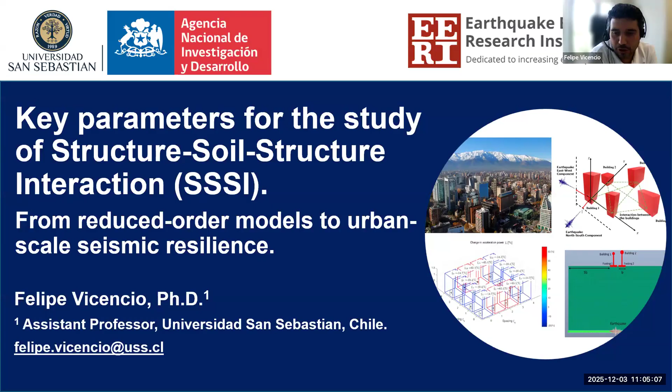So today I will talk about the key parameters for the study of structure-soil-structure interaction. Basically, the work I will show you here is based on reduced order models, which were calibrated in different ways, like finite element simulations and experimental campaigns. Also, I will present some results from the Fondecyt projects that we are working on here in the university. The main goal of this talk is to better understand when neighboring buildings significantly change each other's seismic demands, and how we can capture this in practical analysis.

So this is the outline of the talk. I will start first with a brief introduction of soil-structure interaction. Then I will go deep into structure-soil-structure interaction. Basically, it's a little different because here we start to consider multiple buildings and also some broader concept of site-city effects.

After that, I will describe the low fidelity nonlinear models we use here, how they are built, what assumptions we make, and which parameters are important. Then the key findings from the projects, and finally, I will discuss with you the future work and urban scale resilience, including where I think this line of research is going.

Let me start with soil-structure interaction. Basically, soil-structure interaction is the change in the dynamic response of a structure caused by its interaction with the supporting soil and the foundation system. In every case we have this kind of phenomenon, but for some cases this is not important.

For example, for stiff or rock sites, these effects are often small, and some codes allow ignoring them. But here we are focused on cases where soil-structure interaction is important, for example for soft and intermediate soils.

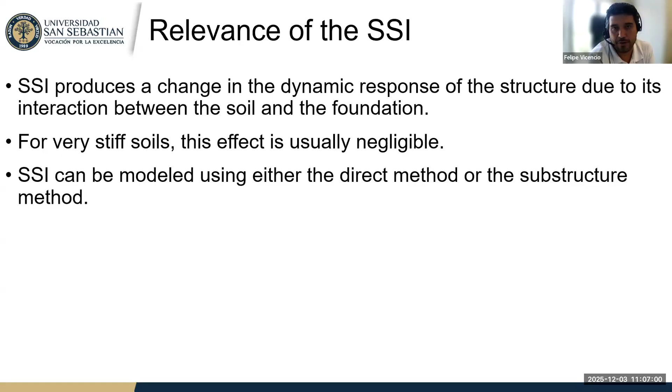Also, SSIs can be modeled using different methods, as we will discuss later. The importance of SSIs depends on three things: the stiffness and mass of the structure, the stiffness of the soils, and the damping characteristics of both the soil and the buildings.

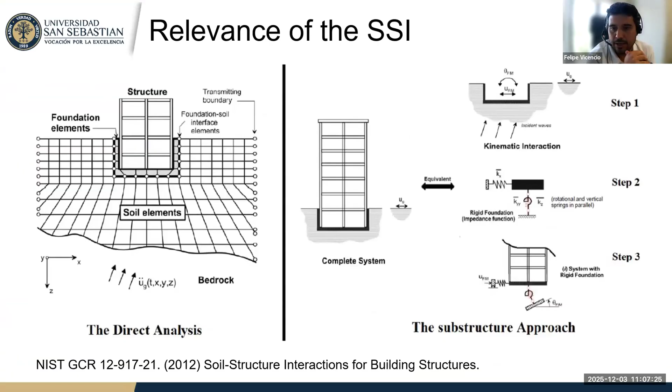This figure is from the NIST report that I recommended, where they explain very well which buildings are important to consider for soil-structure interaction, and also explain the different methods. For example, on the left you have the direct analysis, where the soil and the structure are modeled all together in one large numerical model. We also have the substructure method, which is divided into different steps, where you can consider the kinematic interaction and the inertial effects.

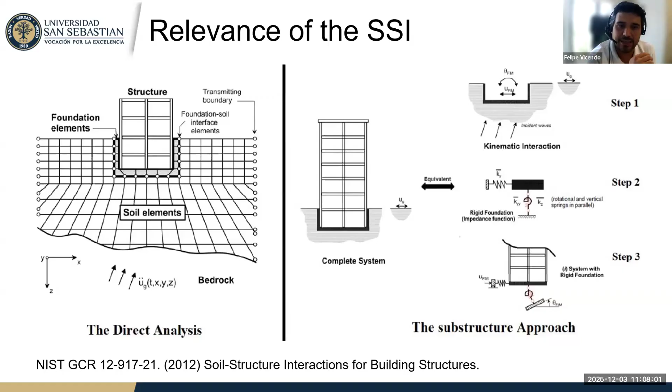Here we are more interested in the relevance of structure-soil-structure interaction. Why is that? In modern cities, buildings are not isolated. Urbanization and current lifestyles have moved population into dense urban centers where structures are separated by just a few meters in some cases and sit on the same soil deposit.

Here we can see a great example: this is Santiago de Chile. We have a large density of buildings built very close to each other. During an earthquake, the deformation of the shared soil layer couples the response of neighboring foundations. This is what we call structure-soil-structure interaction, or SSSI.

SSSI can lead to an amplification or reduction of seismic demand. If we extrapolate a pair of buildings to an entire city, we get the idea of site-city interaction. So when we consider the whole city or a very large neighborhood, we are considering the site-city interaction.

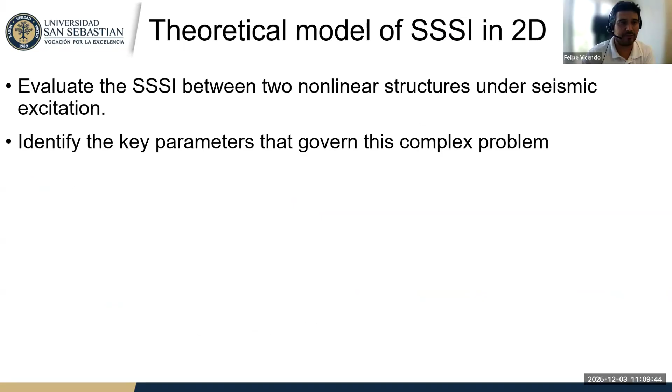So why is this important? The first thing we need to consider is the numerical model, the theoretical numerical model. In this case, we evaluate the SSSI between two nonlinear structures under seismic excitation. Identifying the key parameters that govern this complex problem is very important for us.

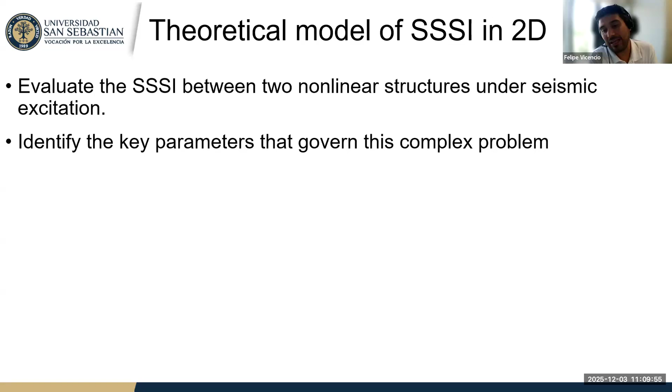To answer this question about the key parameters, we can use a low fidelity nonlinear model like I show you here. For more details, you can see the paper 'Seismic Structure-Soil-Structure Interaction between Inelastic Structures,' where I show all the details and formulation. So now we have just two buildings interacting with each other through the soil.

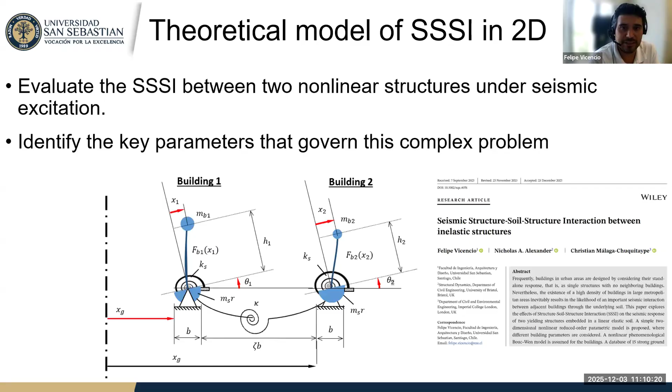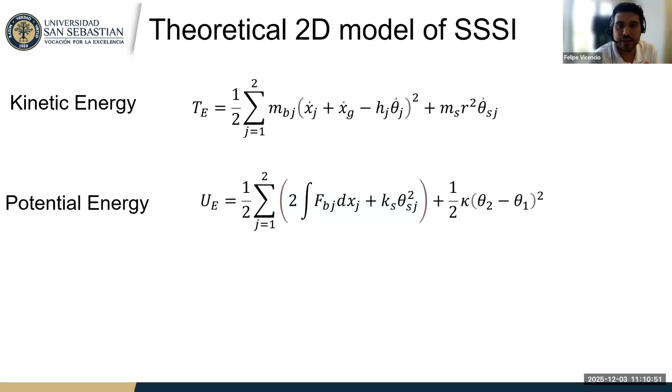The model is formulated in terms of kinetic and potential energy. The kinetic energy includes the translation of the buildings and the rotation of the foundation. In the case of the potential energy, we consider the nonlinear behavior of the buildings, we can also consider the nonlinear behavior of the soils, and also the parameters that include the interaction between these two buildings.

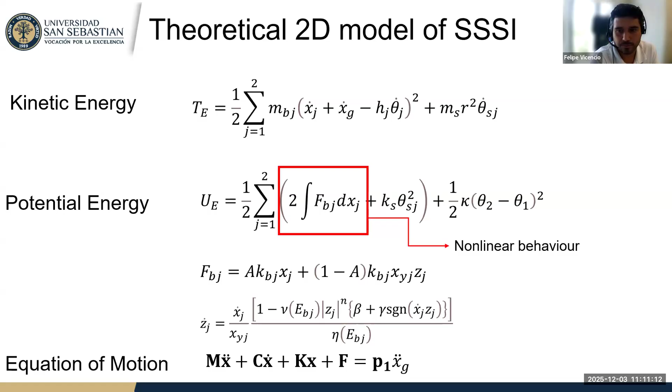To model the nonlinear behavior in this particular case, we use the Bouc-Wen model, so at the end we can write the equation of motion for the whole system. The thing is, the stiffness between the buildings is not arbitrary—it's derived from simplified analysis expressions and then calibrated against more detailed models.

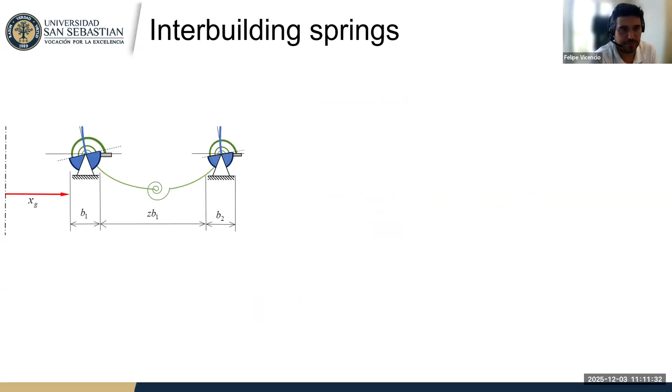This includes finite elements and experimental data from the literature. Here I show you one of the calibrations using theoretical and numerical analysis. Our aim is to try to estimate this kappa parameter, and then we can rewrite the equation of motion.

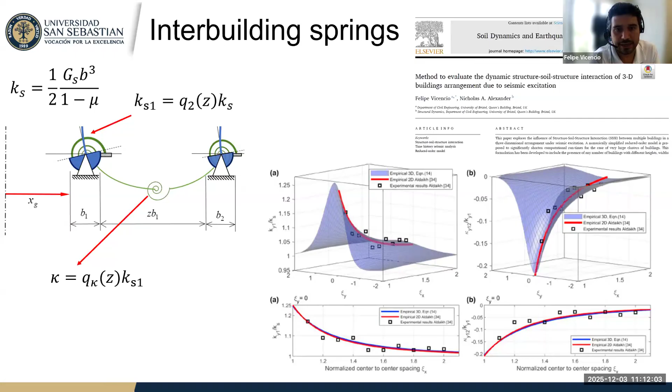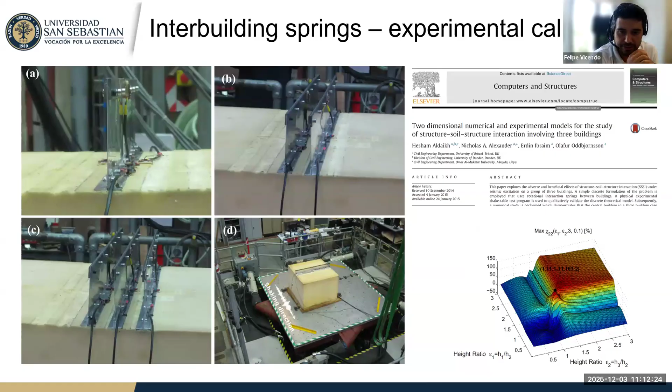For more details, you can also see this paper that we wrote with Nick Alexander from Bristol. We also have to calibrate this interactional spring and these interbuilding springs using some experimental campaigns. In this case, I show you one particular campaign considering 1, 2, and 3 buildings, but you can also have a more complicated configuration with different heights, different inter-building spacing, and different numbers of buildings.

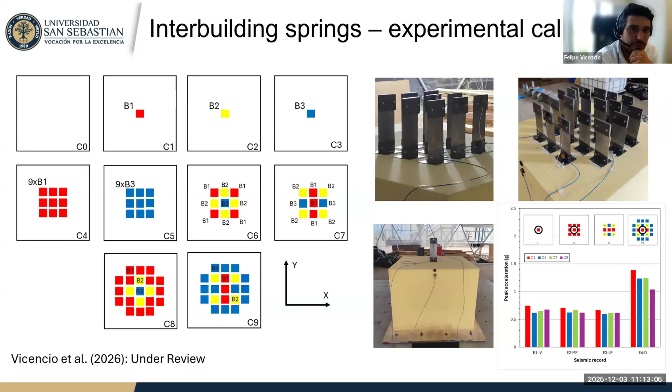This is a paper I'm working on right now that is under review, where we calibrate these interbuilding springs and compare the seismic response for 1, 9, and 19 buildings. This is basically our experimental campaign using the shaking table from the Universidad de Santiago. We also have to calibrate and compare the response using high-order finite element methods.

We can also show you some work we are doing here for asymmetrical buildings, isolated buildings, and different kinds of buildings, because basically you can rewrite and recalibrate this kind of configuration depending on the structural typology and the soil properties.

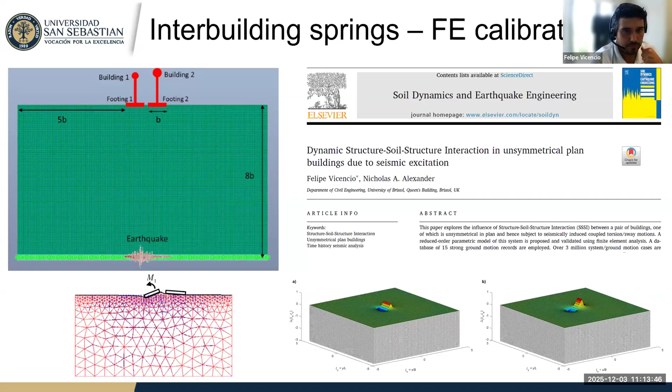Here are some simulations using high-order finite element methods, considering CLT buildings, basically cross-laminated timber structures. The interesting thing we can see in every calibration is that the interaction between buildings is important. Obviously it's not important for every kind of structure and every kind of soil, but for some particular parameter configurations, this change in the response can be very relevant.

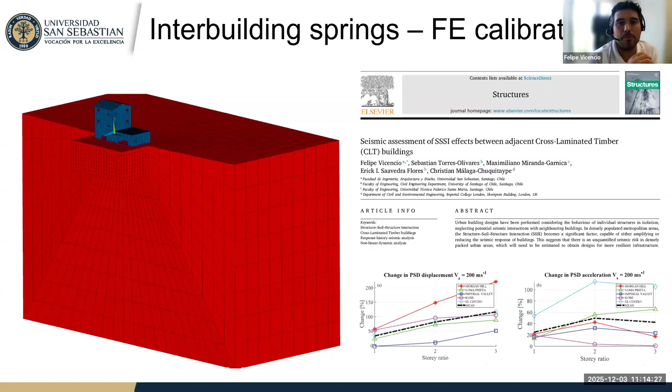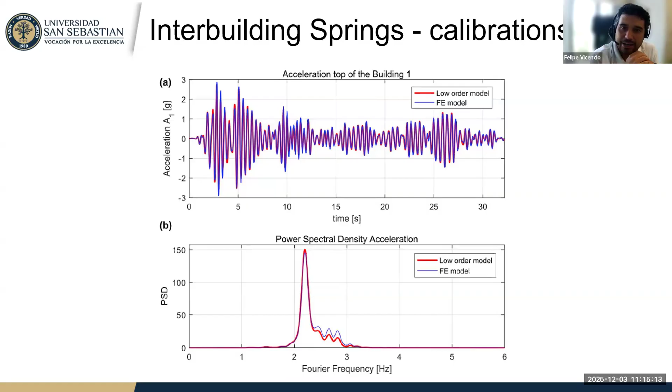After that, we calibrate our low order model using the experimental campaign and the high order finite element method. As we can see in this figure, the red line is the low order model and the blue line is the finite element model. We have a perfect match between the two models. So basically we can extract all the complexity of the soil and the structure, and model this large and difficult problem using just a reduced number of degrees of freedom.

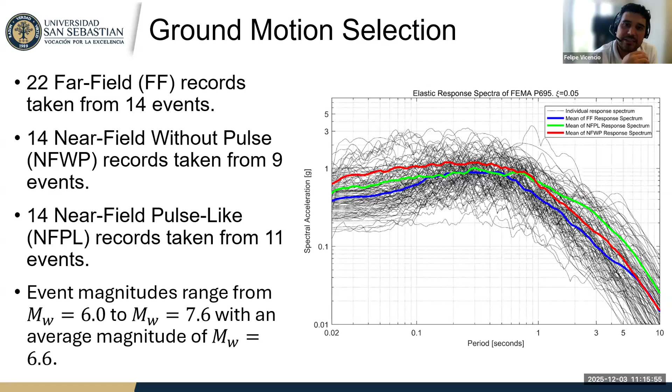Then we subject the system to real earthquake records. In this project we use a different set of earthquakes, considering far field records, near field without pulse records, and near field pulse-like records. These records cover a range of magnitudes, distances, and frequency contents. Here we can see the variability of all these 100 time histories.

Now we can see the different results for different cases and which ones are the relevant parameters.

First, to compare the SSI and the triple SI in a meaningful way, we use energy-based metrics. For example, we compute the total power of the displacement and acceleration responses using the power spectral density, and define the percentage change in response between triple SI and SSI. We do this because comparing the percentage change in the power spectral density gives us a real understanding of the whole time history of the earthquake, not just a simple peak. You can also compare a simple peak, but the problem is that depends so much on the earthquake you are considering.

In this case, a value of 0 means no difference. A positive value indicates an amplification of the response due to the triple SI, and a negative value indicates a beneficial reduction due to the other buildings. We evaluate this metric at the top of each building, considering both displacement and total acceleration, which are directly related to drift and inertial forces. Obviously you can compare different parameters and quantities that you are interested in, like drift ratio or velocity, whatever you are looking for.

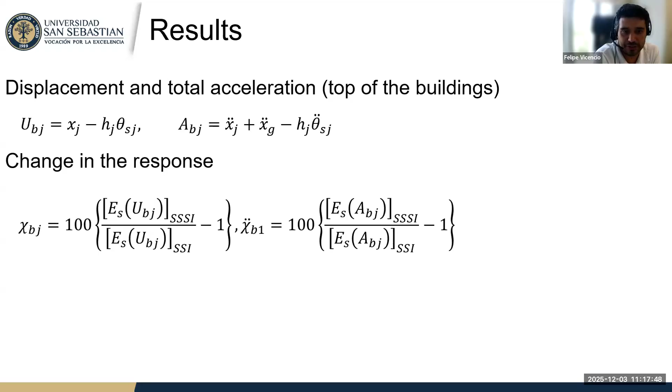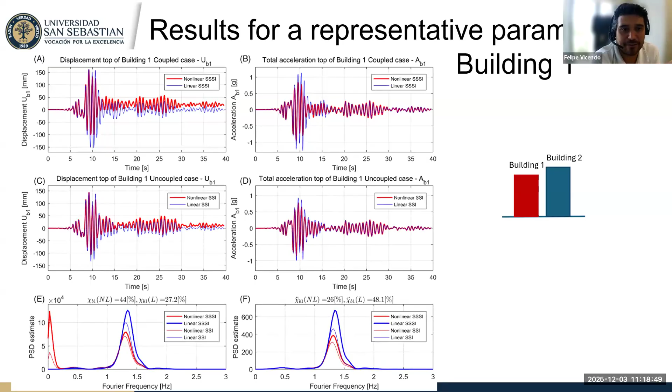Then we can also compare between SSI and triple SI, and we can see a change in the response for the nonlinear case of 44% for the displacement, and 26% for the acceleration. Remember this is the change through the whole time history. I think this kind of quantity is very important for this particular parameter set.

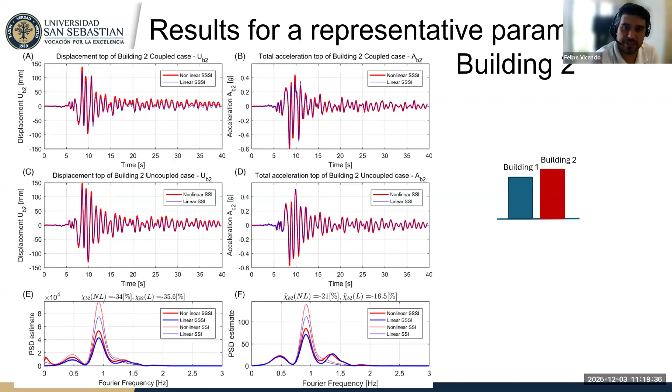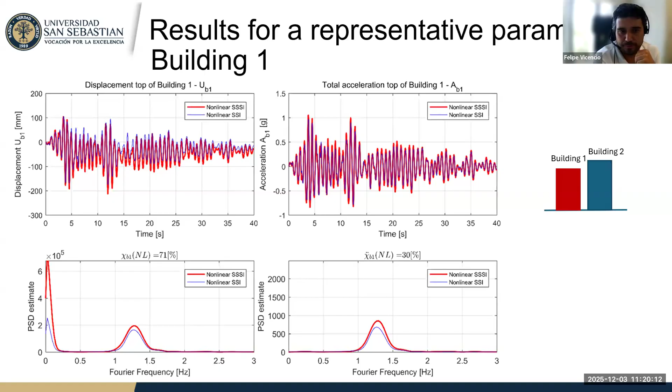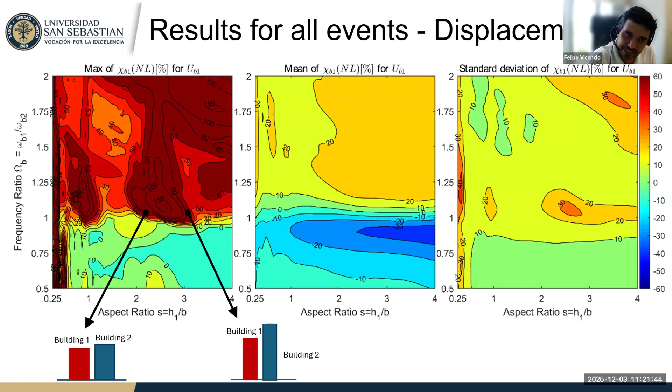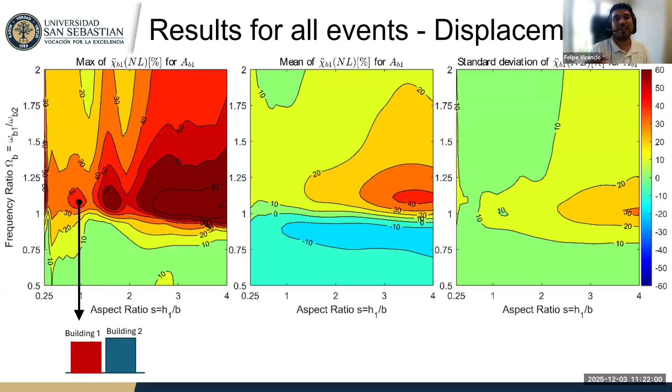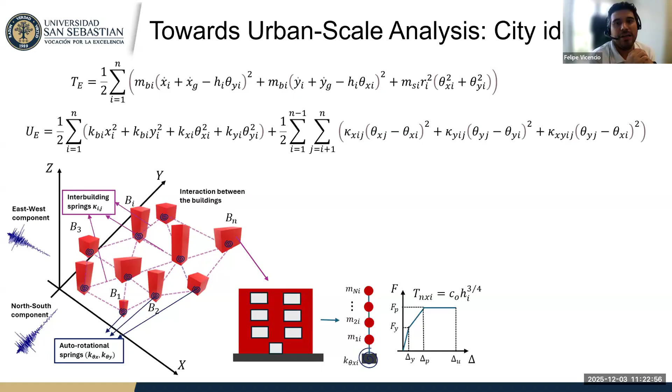So here the equation gets a little more difficult, obviously, because you have more buildings. You can have a larger number of degrees of freedom for each building, and more complex nonlinear behavior for the buildings and for the soils. But at the end, you can write the whole equation of motion for the whole system, and also the whole interaction between every building of the system.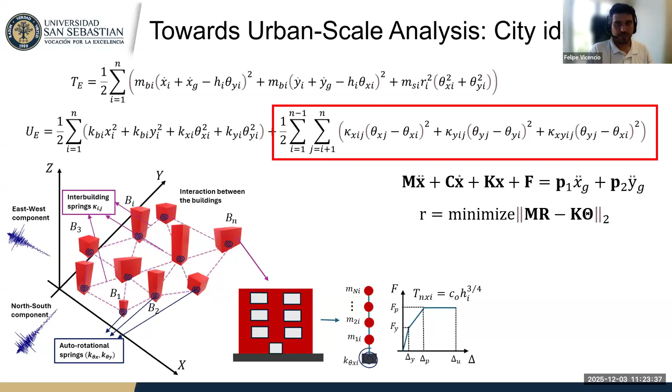So in this case, it is possible to calculate the seismic resilience at the city scale. Here we can see some examples. For more details and more examples, you can see the paper that I put here.

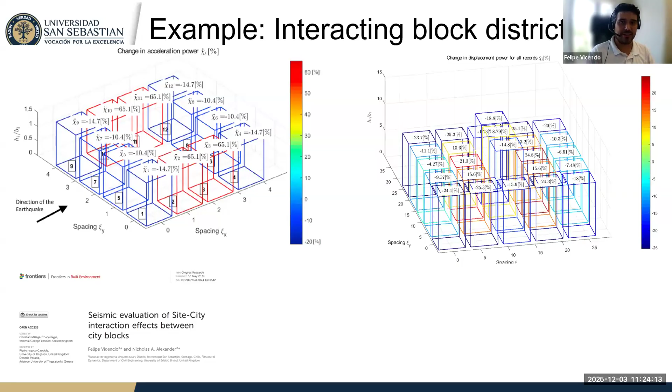So some small conclusions. First, structure-soil-structure interaction can significantly alter the seismic demand. This is, I think, the most important conclusion of all this study.

For realistic ground motion and nonlinear behavior, structure-soil-structure interaction can amplify displacement and acceleration response by 20 to 40% on average. For some particular cases and particular earthquakes, 150 to 200% for certain configurations.

The most important parameters are the height ratio, or frequency ratio—basically the same thing—between neighboring buildings, the aspect ratio of the structure, the soil stiffness, and the spacing between the foundations. If you increase the distance between the buildings, all these phenomena decrease.

As a general rule, shorter buildings next to taller buildings are particularly vulnerable, especially on soft soils and when the periods are close, like a ratio of 1.1 when you divide one by the other.

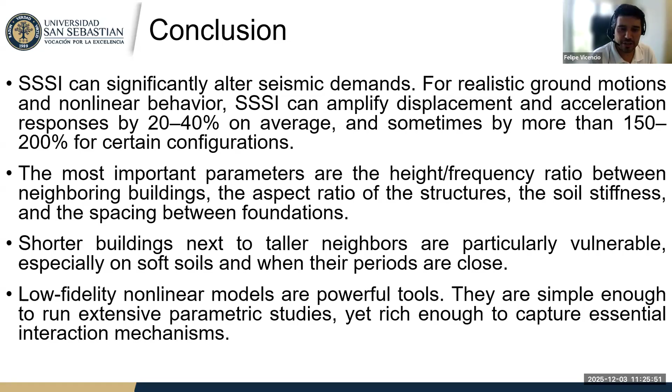Also, as a general conclusion, low fidelity nonlinear models are powerful tools. They are simple enough to run extensive parametric studies, like millions of different cases, yet rich enough to capture essential interaction mechanisms. And now, what we are doing, or what is the future of the research, is calculating the

urban scale application of this phenomenon—basically, the seismic resilience assessment at the urban scale.

So first, what are the different components of this framework? The first thing is to choose a city location, and find out the portfolio of buildings of interest. For example, we're interested in this neighborhood for some reasons.

Then we can find out all the properties of every building using expert models already published in the literature, freeware data available in OpenStreetMap, also regional satellite imaging like Google Earth or open building datasets. Also, we can use municipality information and tax information.

Then we can find out the geotechnical properties of the site. What kind of geotechnical properties are interesting: shear wave velocity and density for every part of the portfolio of buildings. And then we have to simulate different seismic scenarios for this particular site.

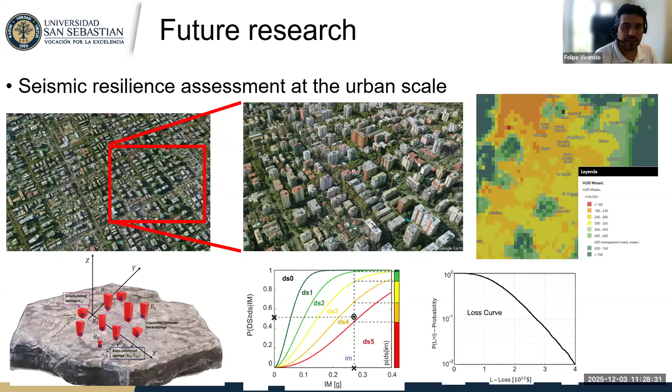So basically, this is what we're working on now, and I hope that next year we are running some case studies from a city in Italy and a city in Santiago.

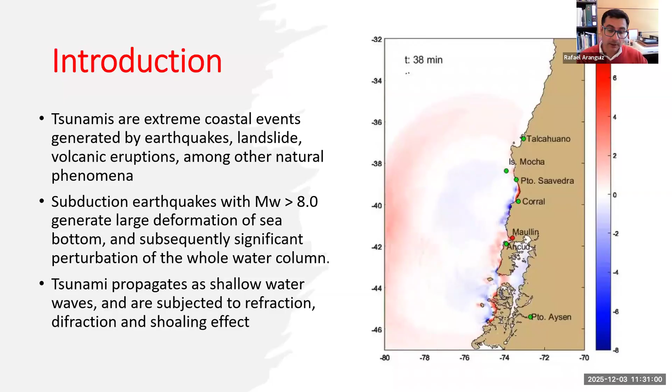Why should we study tsunamis? We know that tsunamis are very extreme coastal events generated by earthquakes, landslides, volcanic eruptions, among other natural phenomena. In general, earthquakes of magnitude larger than 8 can generate this sea bottom deformation and tsunami. And this tsunami propagates, as we can see in the image on the right-hand side, as shallow water waves subjected to different phenomena like refraction, diffraction, and shoaling until we have the effect on the coast and on the infrastructure.

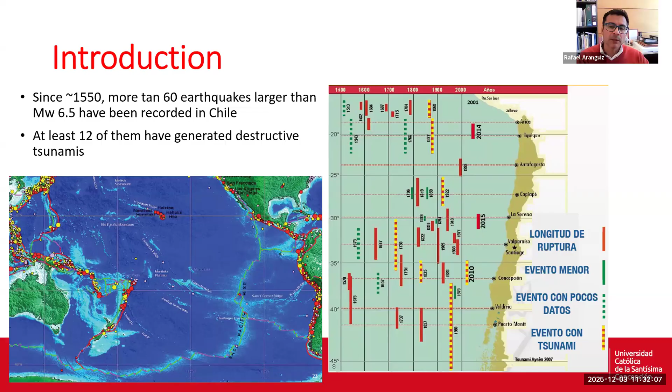So we can see that we have several events of earthquakes and tsunamis, like the one in 2010, 8.8, with a tsunami which reached up to 29 meters on the coast. And we also have the largest recorded event in history, the 1960, which is 9.5, and the earthquake generated a tsunami which affected not only the Chilean coast, but also the entire Pacific Ocean. So that's why we need to understand this phenomenon and design structures against tsunamis.

In general, when we are focused on development of tsunami resilient communities, we have several dimensions, at least six, including tsunami hazard, early warning, and physical and environmental systems. But we also have governance and institutional policies, tsunami awareness and education, and social ties and community. When we talk about tsunami engineering, we are more focused on the first three dimensions, especially the third one related to physical and environmental systems, the design against tsunami loads.

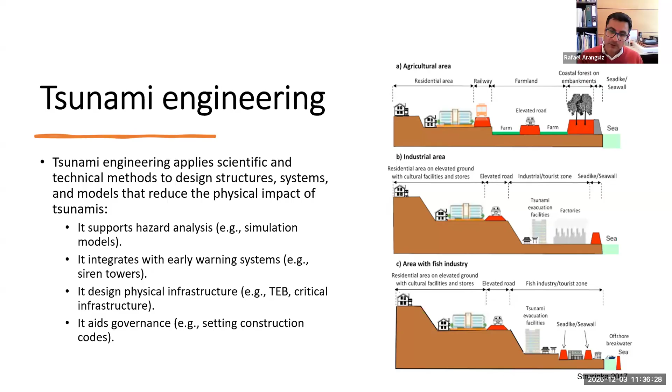So when we're talking about strategies to control tsunami impact, we are talking about several layers to control, stop, or decrease tsunami energy and subsequently the tsunami impact on the structures. If we want to design structures against tsunami, of course, we have the ASCE standard 7-22, the minimum design loads and associated criteria for buildings and other structures, and we have the specific chapter 6 for tsunami loads and effects.

When we are talking about tsunami loads, we are talking about mainly 4 forces. There are other forces, but mainly 4. It is the initial impact force, the impulsive force when the tsunami bore or the first inundation arrives against the structure. Then we have the hydrodynamic force, like the drag force we study in fluid mechanics. Then we have other impact forces due to tsunami debris, containers or remains of damaged structures. And we also have debris damming. This debris damming against the structure can also generate another impact.

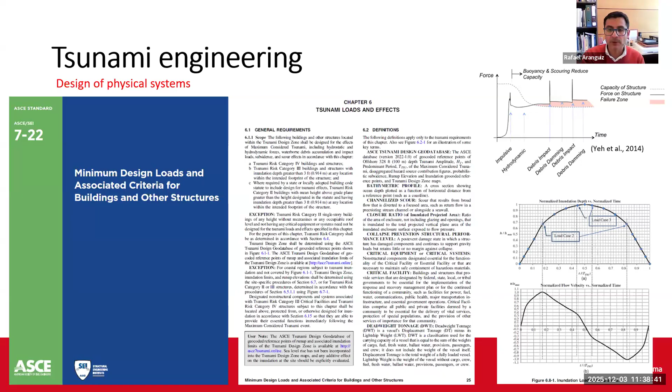So this is very, very important to have in mind when we are designing the structures. We cannot just combine the maximum velocity and the maximum inundation because they are not happening at the same time. If we do this, we are really, really conservative from the structural point of view.

And these forces are the drag force, including the scour around the structure. So it's not that simple, we don't just apply forces. We need to analyze the damaged building with the tsunami forces using these different load combinations.

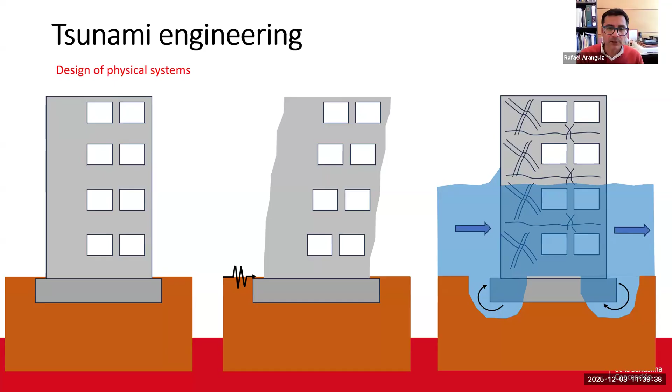What's tsunami scour? Tsunami scour is one of the main causes of structural failure, and we are talking about the erosion around the structure due to the different vortices generated by the interaction of the flow with the structure. And what is interesting here is that when we do a field survey after a tsunami, we generally measure the tsunami scour, the scour depth.

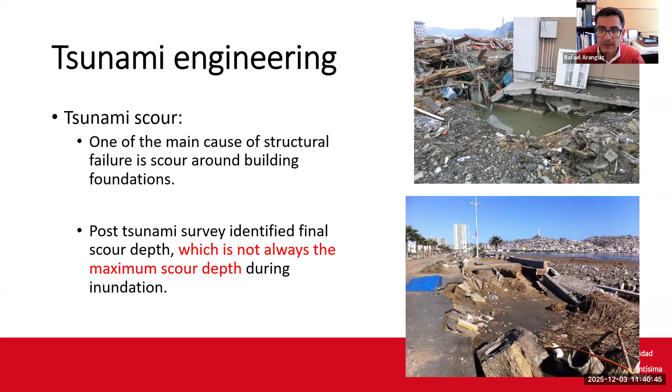We have seen some equations based on these measurements, and we can design a structure considering these measurements. But the tsunami survey identified that final scour depth is not the maximum. The maximum can happen during the inundation. And this maximum scour depth can cause the structure failure, not the final scour. So we will see some analysis in the coming slides.

In a recent paper we just published, we performed some experimental analysis in the lab, combining with a numerical simulation using DualSPHysics. So we have this 20 meters long wave flume. We generated a solitary wave, and on the other side we have a beach, the slope 1 to 20, and a square structure like a building. And inside we used an endoscopic camera with a mirror in order to observe the scour around the structure.

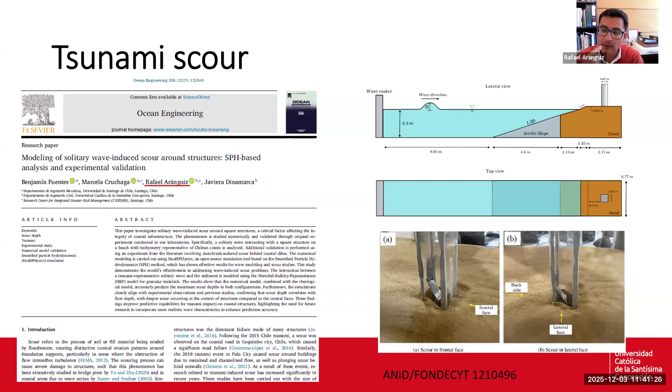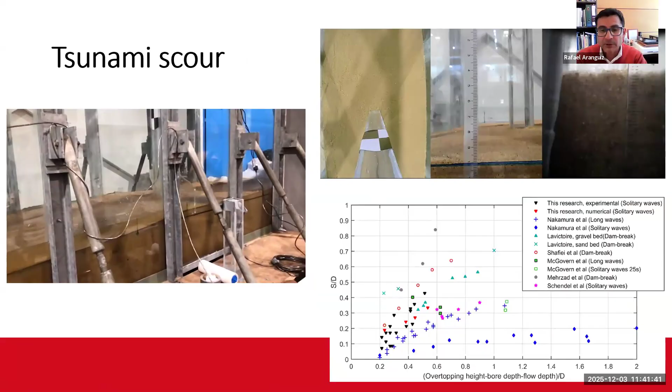So we performed some experiments. Here we can see the solitary wave, and now we have the slow motion of this wave arriving to the coast and impacting the structure. In the upper part, we have different views of the cameras, the top view, the side view, and the camera inside. So on the right-hand side, we see the camera inside. So we can see the maximum scour, and then when the return flow, there is a small slumping of sediment into the hole.

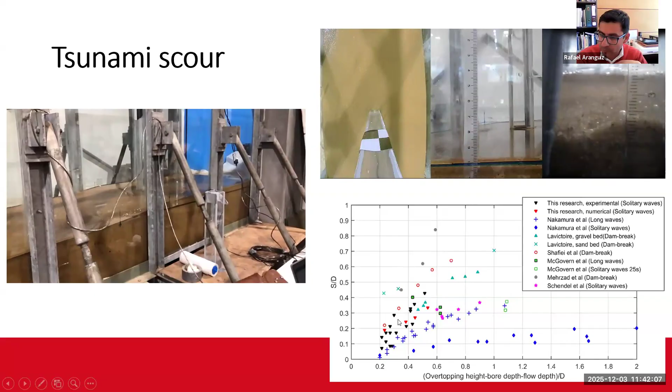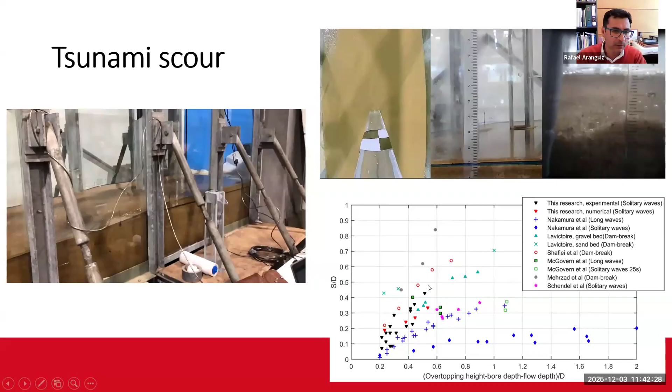We combine these results, the black triangle with the red triangle here, with many other research. So we see that the larger the flow depth compared to the size of the structure, the larger the normalized scour depth. However, we are only talking about solitary wave or dam break. The solitary wave does not really represent a tsunami wave.

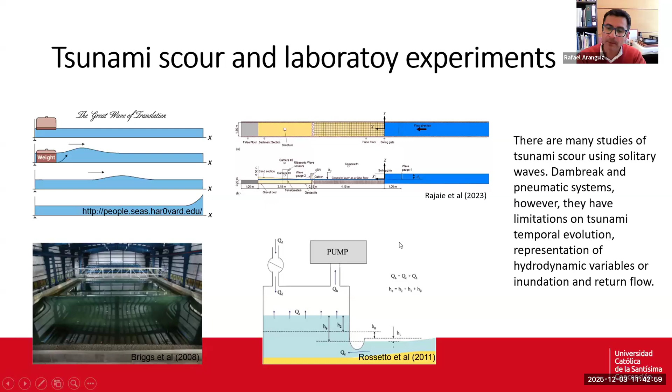When we study tsunamis in laboratory, we can generate these tsunami waves. We can use the dam break system, or recently some people have been using this pneumatic system, so a controlled volume of water in order to generate longer waves. But still we have some limitation regarding the hydrodynamic variables and the return flow. So what I did in my lab was to generate a new system with pumps and gates to generate a flow similar to a tsunami in the coastal area, controlling this velocity and the inundation depth.

So as I said before, the maximum inundation does not take place at the same time as the maximum velocity. So I try to reproduce the variables in this wave flume. So we have the pump, we have a flow straightener, we have the central part with sediment and the column. Here we have some images of the camera inside with the mirrors and these emerging gates to control the flow depth. So with the pumps, I control the discharge. With the gate, I control the flow depth and velocity in the central part, which is the area of interest.

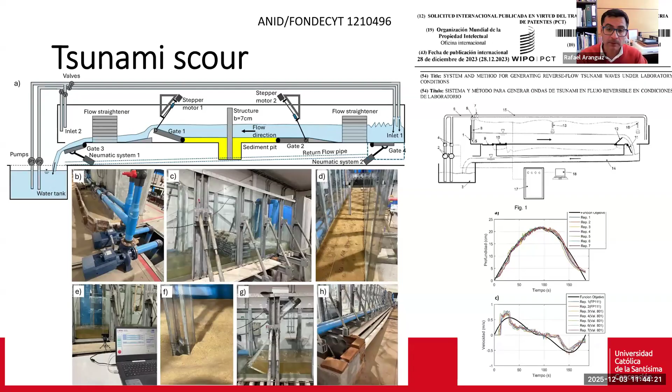So there is a scour around the structure and then accumulation in the backside, and also here we see the accumulation. But when we have the return flow, the pattern changed a little bit, and now we have the accumulation in the other side, in the front side. And actually with this system, I can generate many waves. I simulated up to 3 tsunami waves. We have like different layers of scour, and every time the scour is deeper and deeper.

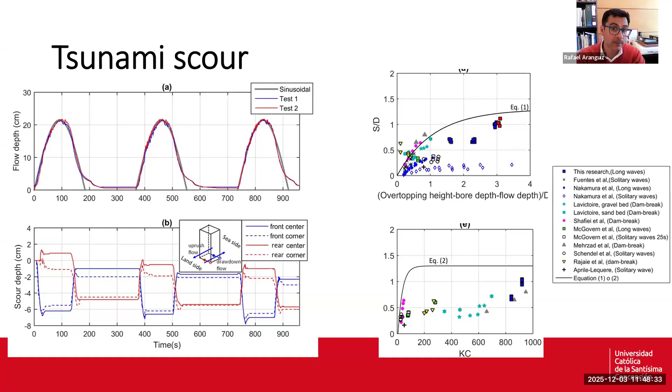So with this research, we have a closer insight into the tsunami scour and the effect of multiple waves and the effect of the tsunami period, for example. So as a conclusion, I could mention that tsunami engineering is a crucial but partial component of tsunami resilience. Don't forget the social parts. Even though we are engineers, we need to deal also with the social side of the resilience.

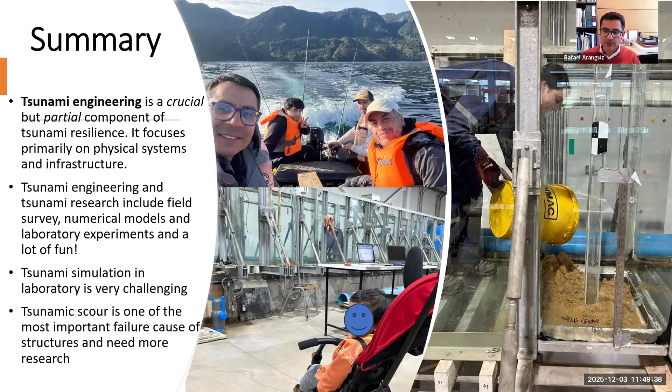Tsunami engineering and tsunami research include field survey. Yeah, this for me is quite exciting. We can do field survey, we can do numerical models, and we can also do laboratory experiments. So it means a lot of fun. And tsunami simulation in laboratory is very challenging due to this complexity of the inundation, maximum velocity. And finally, the tsunami scour is one of the most important failures, and we need to do more research in laboratory and numerical models, for example.